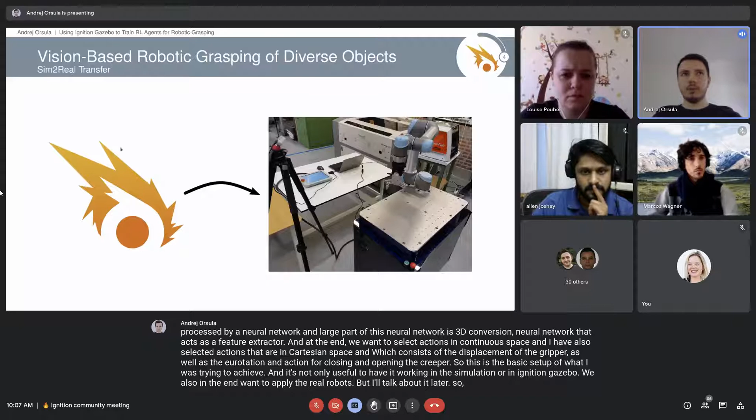But how does one start with creating a reinforcement learning environment inside Ignition Gazebo? For that, I can recommend using GymIgnition. It is a framework that provides an interface for Ignition Gazebo.

This includes a Python interface, which makes it simpler to integrate with some of the popular deep learning and reinforcement learning frameworks. GymIgnition also provides tooling for creation of OpenAI gym environments, meaning the environments you create will follow this standard and be compatible with other reinforcement learning frameworks.

This means you don't actually need to implement the algorithms yourself. You can just use them from other frameworks. For example, in my case, I use Stable Baselines 3 for the implementation of actor critic algorithms.

Once you start building the environment and defining the logic behind it, you will come to a point where you want to insert some models into the simulation. So where to find it?

Again, for this I'll just recommend using Ignition Fuel. It was discussed a few meetings ago. It's really nice. In particular, I have decided to use the Google Scanned Objects collection from Google Research, which contains more than 1,000 different objects, which are 3D scanned.

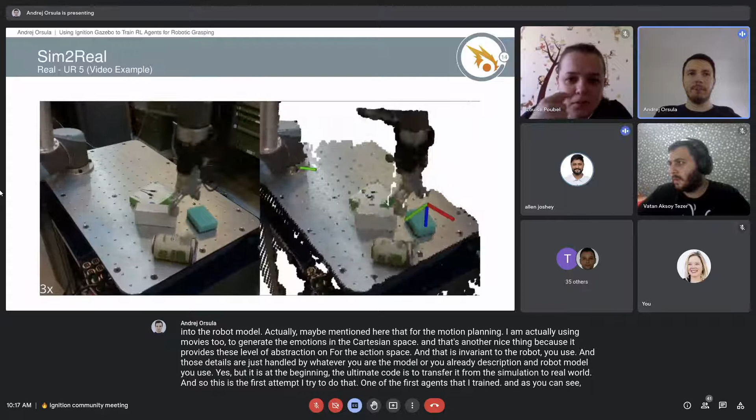As I said at the beginning, the ultimate goal is to transfer it from the simulation to the real world. This is the first attempt I tried, one of the first agents that I trained. As you can see, the policy is not very deterministic. It still does some random actions, but eventually it's able to grasp some of the objects.

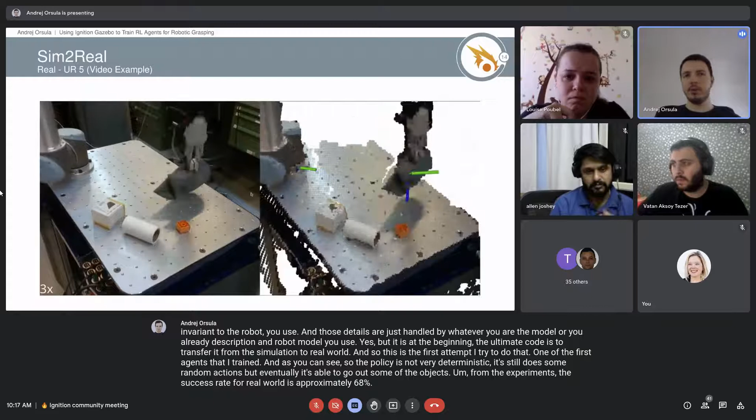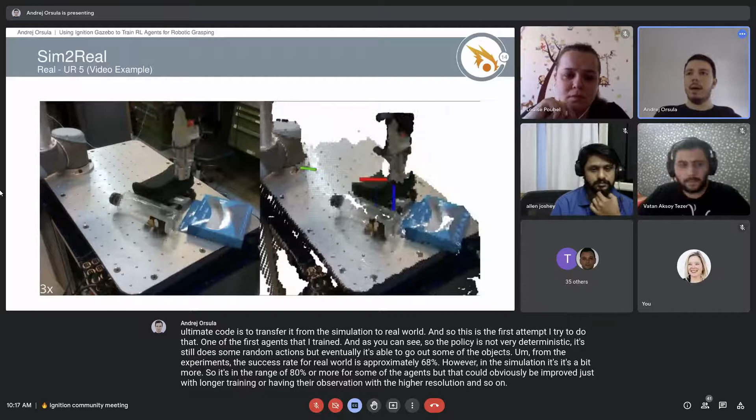From the experiments, the success rate for the real world is approximately 68%. However, in the simulation it's a bit more, so it's in the range of 80% or more for some of the agents. But that could obviously be improved just with longer training or having better observation with a higher resolution, and so on.

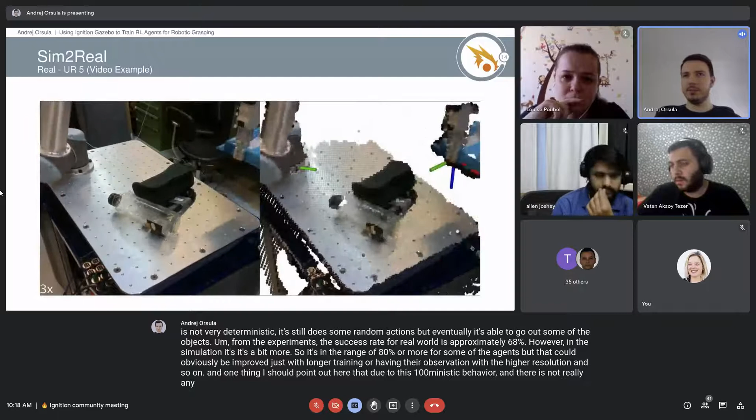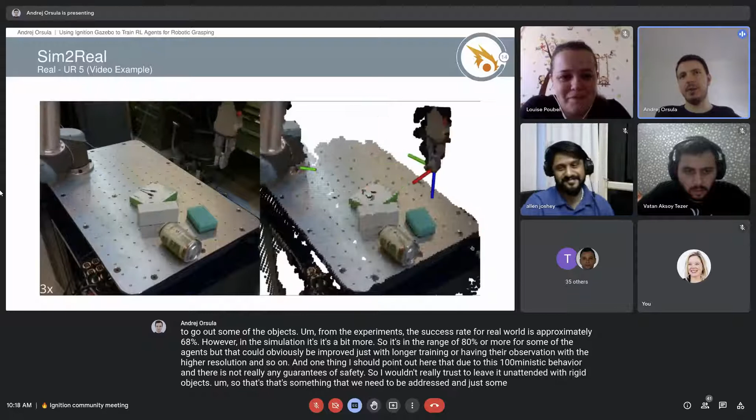One thing I should point out is that due to this non-deterministic behavior, there are not really any guarantees of safety. So I wouldn't really trust leaving it unattended with rigid objects. That's something that will need to be addressed, incorporating some safety into it, probably with some traditional approach or something.

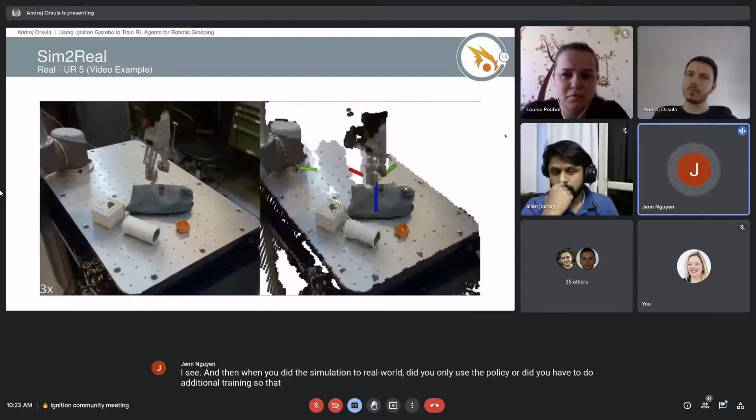I see. And then when you did the simulation to real world transfer, did you only use the policy, or did you have to do additional training so that it works well in the real world? What were your difficulties with that?

There was no retraining in the real world, so it was just trained in simulation and then directly transferred to the real robot using exactly the same thing. The only difference was the controller for the robot, more or less, and use of a physical camera to acquire the data instead of Ignition rendering.

Okay, thank you. I have a question. So as you presented your results, you said that in simulation you had approximately 80% plus accuracies, and then in real world you got a bit lower, as you said, close to 70%, right?

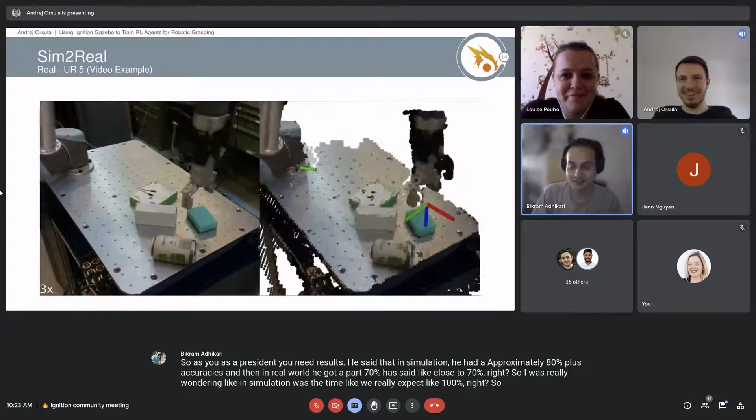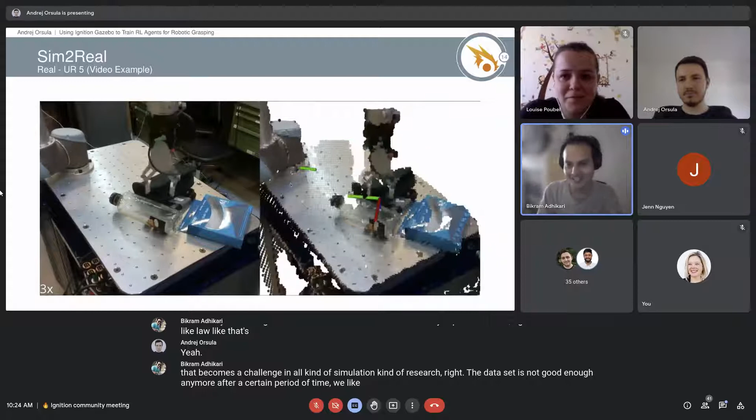So I was really wondering, in simulation, most of the time we really expect like 100%, right? So at least that becomes a challenge in all kinds of simulation research. The data set is not good enough anymore after a certain period of time. We're really good at grinding the data. So what are the things that made you feel like at 80% you're pretty good with your simulation work?

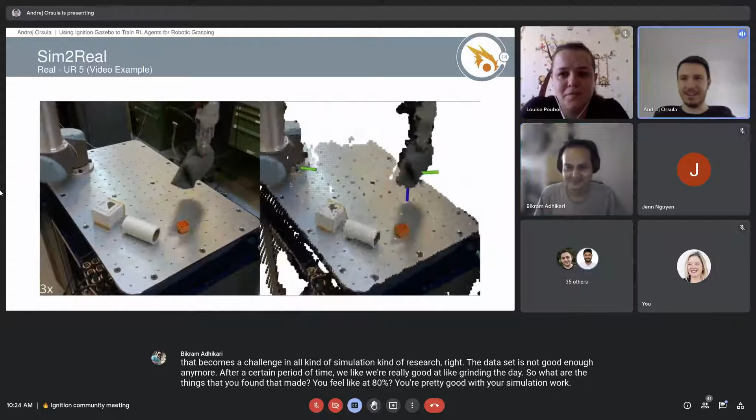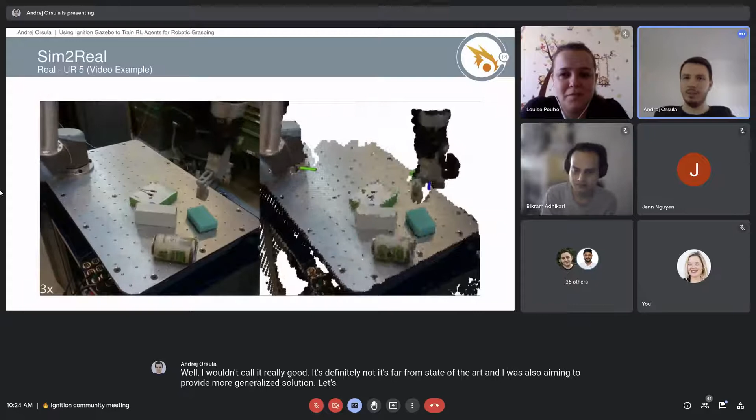Well, I wouldn't call it really good. It's definitely not. It's far from state of the art. But I was also aiming to provide a more generalized solution, let's say, and it's also an end-to-end approach, whereas some of the more robust solutions would use grasp synthesis instead of full control.

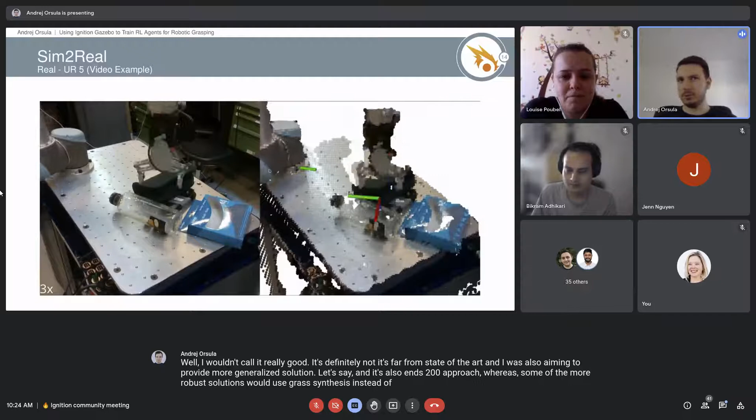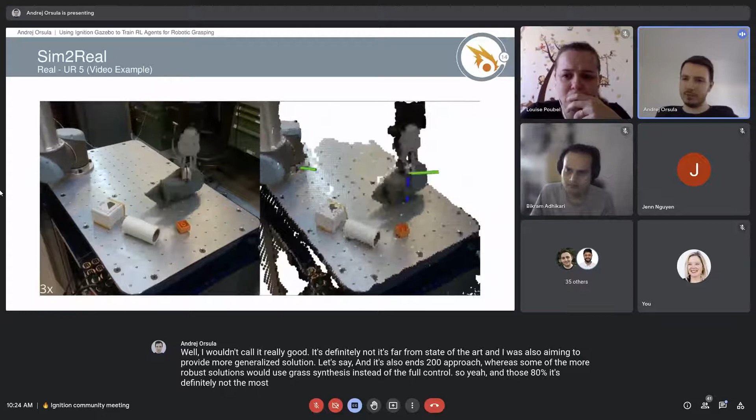So yeah, those 80%, it's definitely not the most that can be achieved on those objects within the simulation. It's just what I had time for, let's say, to train. Obviously, it would be much nicer to have it trained for longer, but I only gave 3 days for each of the agents.

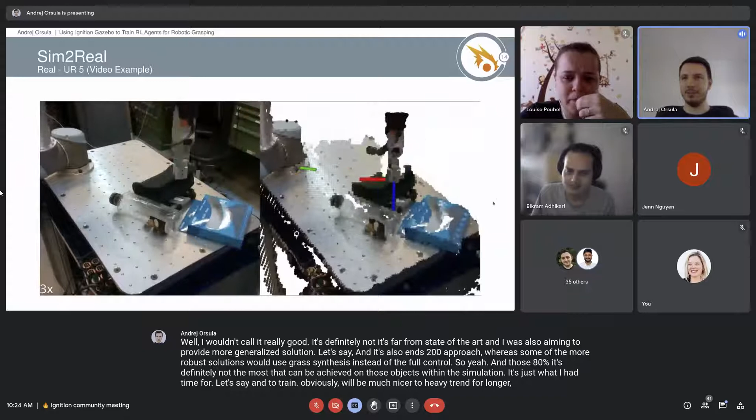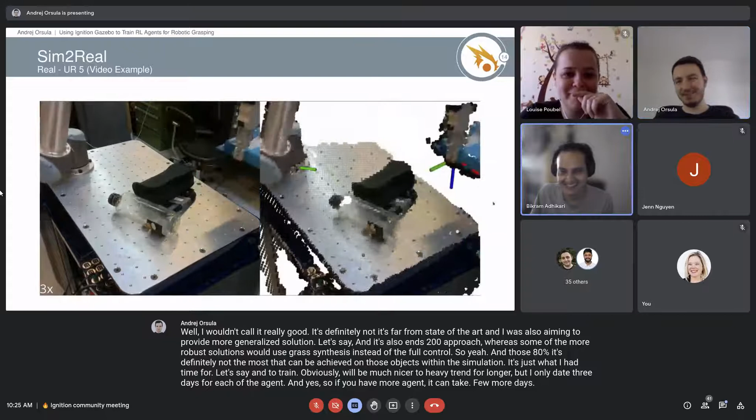Yes, so if you have more agents, it can take a few more days. Yeah, thanks, Andrej. Nice presentation. Thank you very much. Thank you.

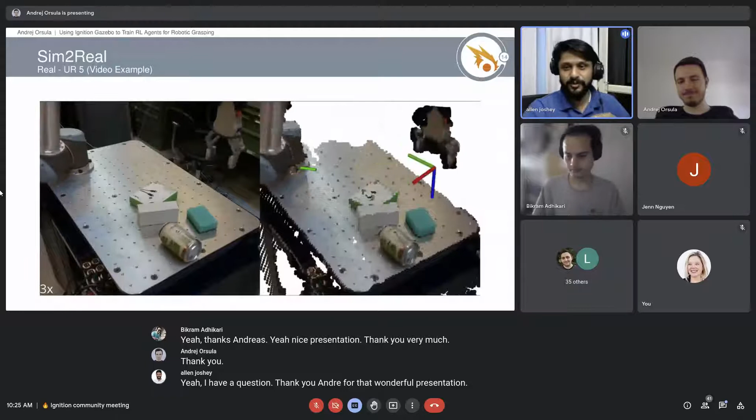Yeah, I have a question. Thank you, Andrej, for that wonderful presentation. I just wanted to know if you have considered any sort of sensor fusion approach to this, in terms of maybe taking feedback based on force or torque, based on the rigidity of materials. Is it possible to go ahead and fuse that so it hopefully gets better at the whole grasping setup?

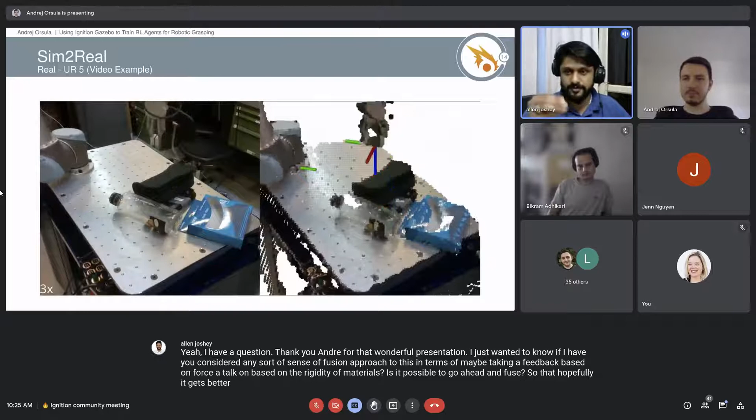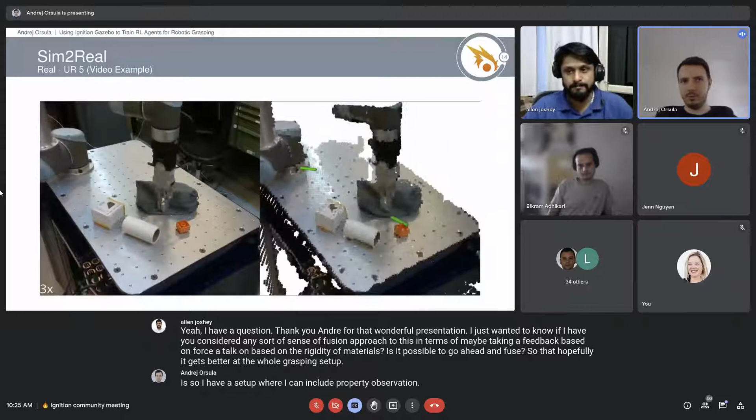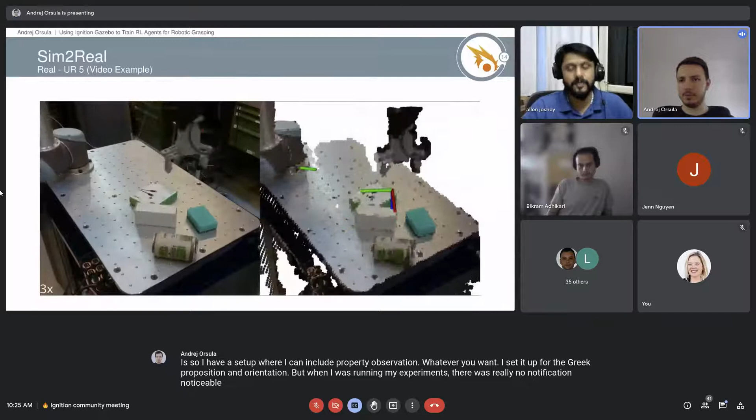Yes, so I have a setup where I can include proprioceptive observation, whatever you want. I set it up for the gripper position and orientation. But when I was running my experiments, there was really no noticeable difference in the success rate between those two. It was only like 2% across all scenes, which wasn't really worth the effort.

But it might be a good idea if you want to include the forces and torques, as you mentioned, especially if you have some sensitive objects and so on. I was really just focusing on rigid objects, and I wasn't really worried about breaking. Right, okay, thank you.

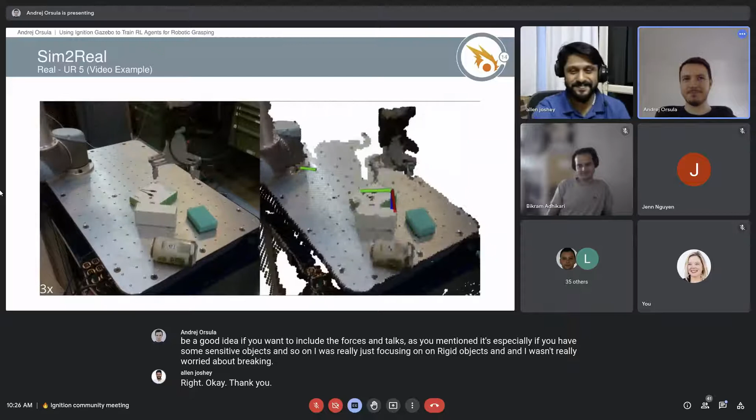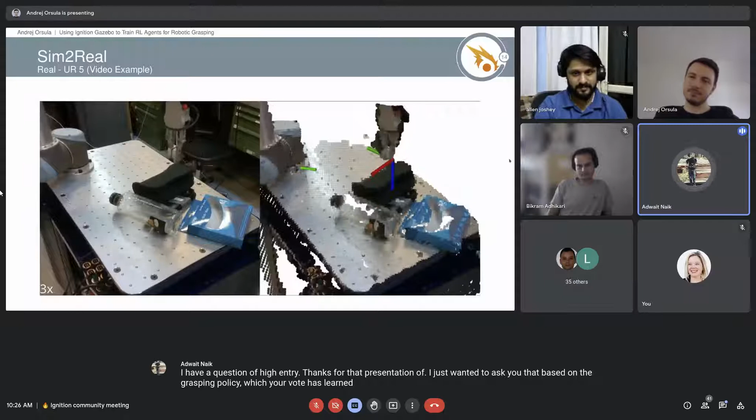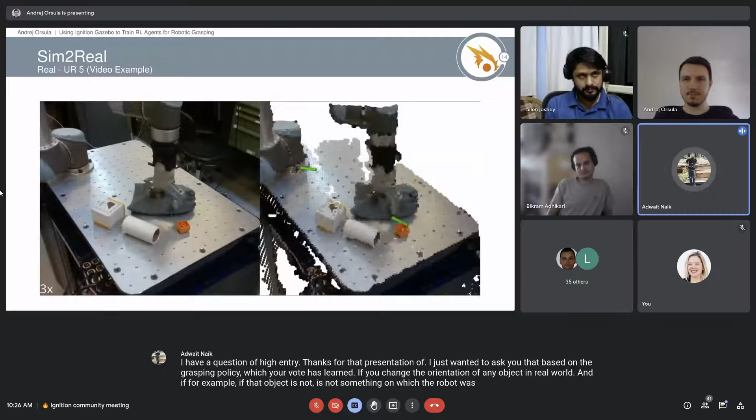I have a question, hi Andrej. Thanks for that presentation. I just wanted to ask, based on the grasping policy which your robot has learned, if you change the orientation of any object in the real world, and if, for example, that object is not something the robot was trained on, so it's an unseen object.

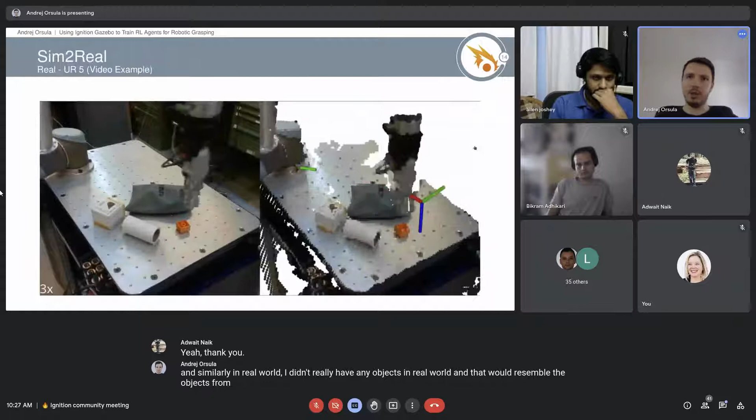So can your robot pick it while training it in the real world? Yeah, so all of these objects were previously unseen, and actually these are all novel scenes. As I showed here, I separated the dataset for training and testing. This was used to actually evaluate the agents, and those were the 80% or whatever it can achieve. Similarly, in the real world, I didn't really have any objects that would resemble the objects from the simulation. It was just some random objects that I had in my hand.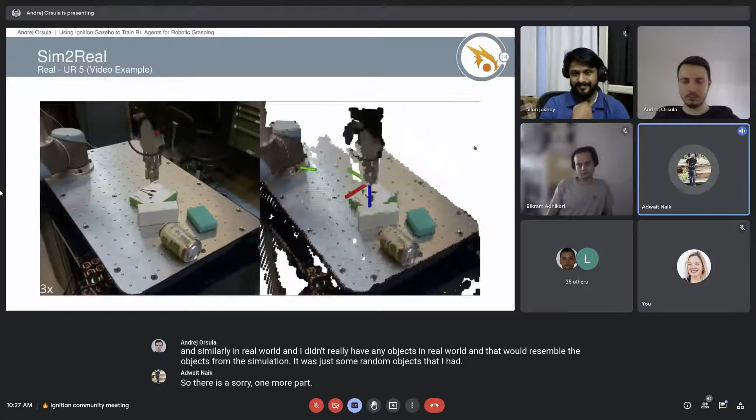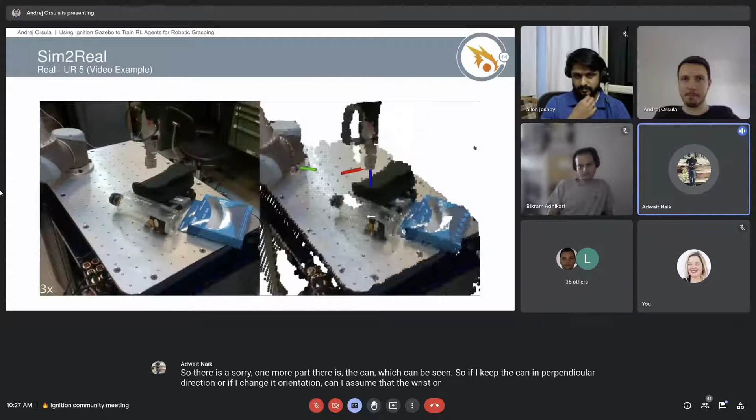So there's one more part, sorry. There is the can which can be seen. So if I keep the can in a perpendicular direction, or if I change its orientation, can I assume that the wrist or the end effector is also going to change its orientation according to the object?

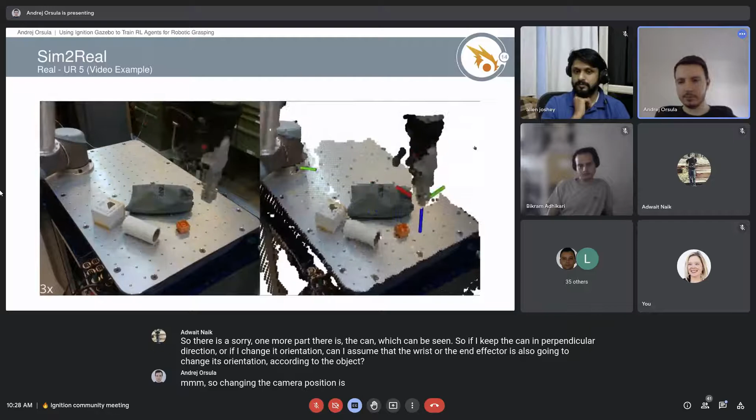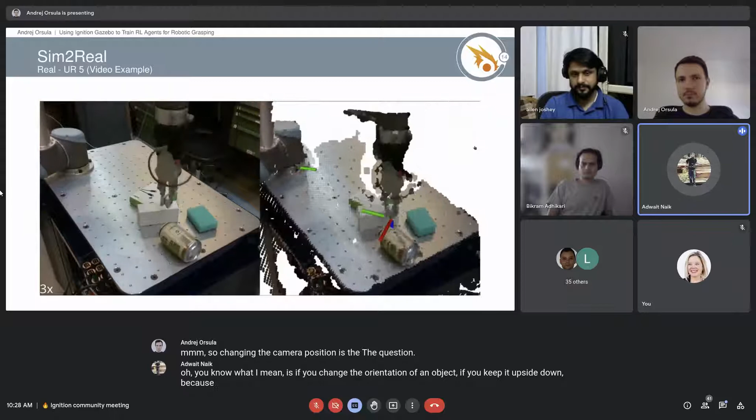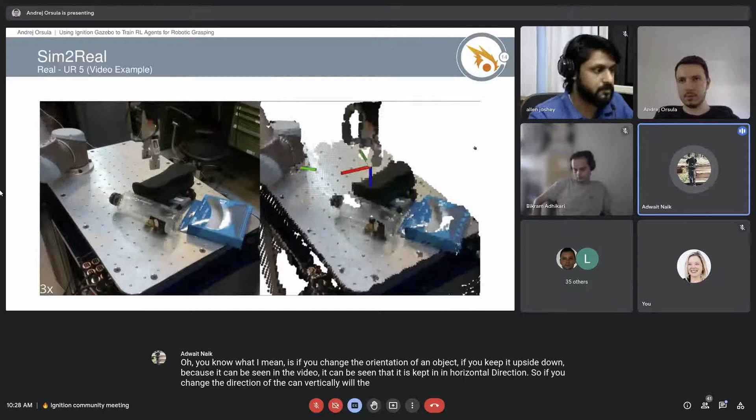So changing the camera position is the question? No, what I mean is, if you change the orientation of an object, if you keep it upside down - it can be seen in the video that it's kept in a horizontal direction. So if you change the direction of the can vertically, will the wrist, will the end effector, also change according to the can?

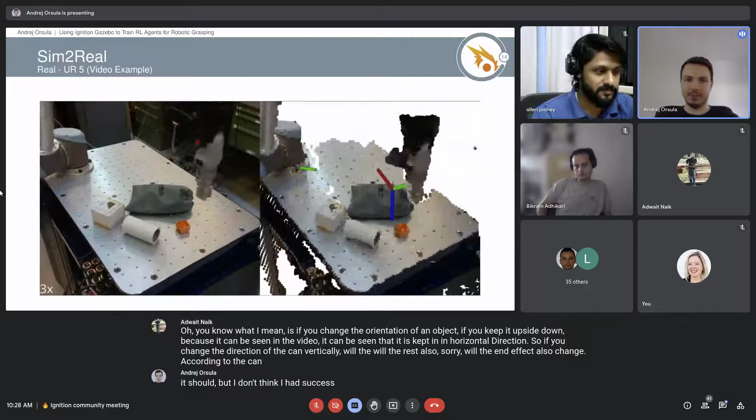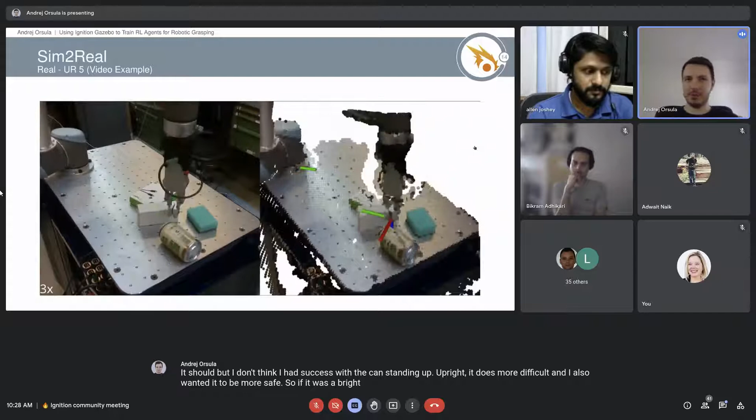It should, but I don't think I had success with the can standing upright. It's just more difficult, and I also wanted it to be more safe. If it was upright, it would be more structurally rigid, and there could be some damage if the robot hit it from top down. So that's why I just let it lay down.

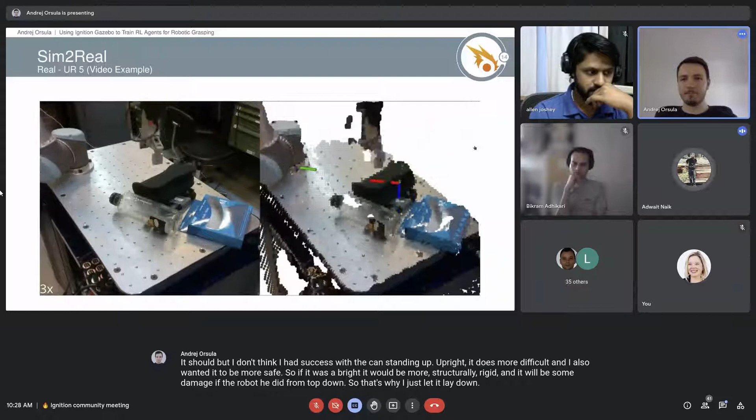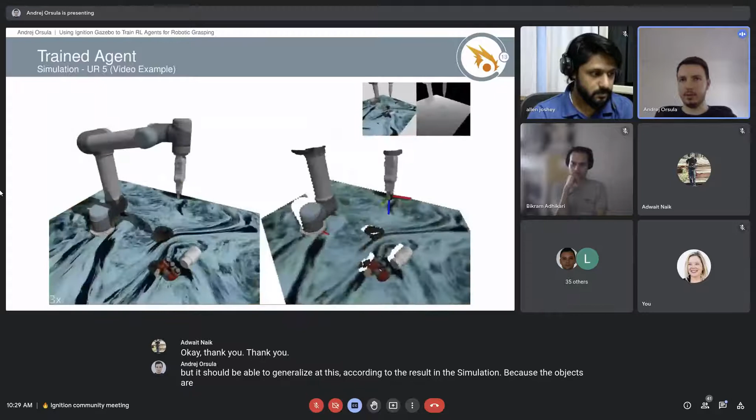Okay, thank you. But it should be able to generalize, at least according to the results in simulation, because the objects are spawned randomly. Obviously there is some bias when I am placing the objects there - I don't place them in a way where it could damage the robot. Okay, understood, thank you.

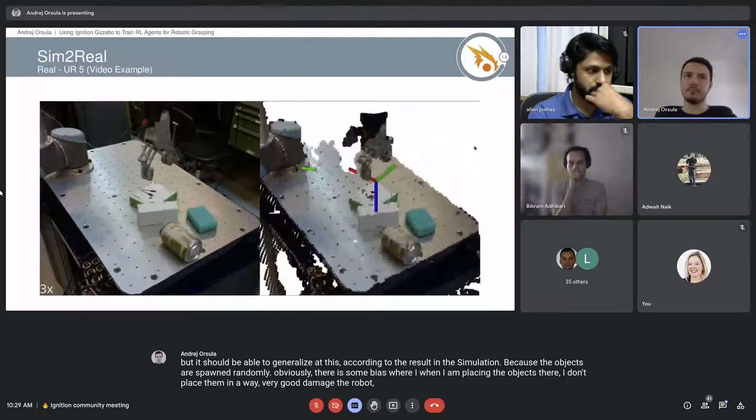So this is not all of them. I did not use all of them because currently the assets for both the mesh and texture within Ignition are kept within RAM and VRAM, which means I would run out of memory if I tried to use all of the objects, which is why I selected just 80 and 20 - 80 for training, 20 for testing.

Yes, but how have I selected this? I just aimed for the ones that were single objects and that had some variety in them. Also, many of these objects are either boxes or shoes or similar objects, and I didn't want the majority of my dataset to be just boxes and shoes. So I aimed to not only have different visual appearance, but also different shape.

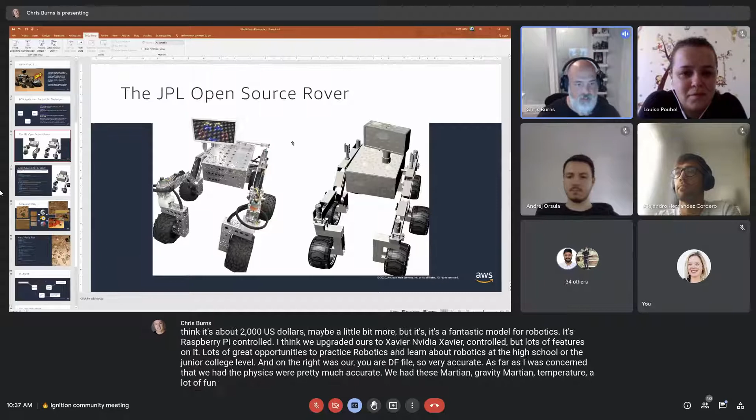On the right was our URDF file, very accurate as far as I was concerned. The physics were pretty much accurate. We had to use Martian gravity and Martian temperature, which was fun to experiment with to get correct. As mentioned, this exists as a URDF file, with a camera and several IMU sensors on the wheels to detect speed.

We kept the challenge relatively locked down. I struggled creating it, with making it too hard or too easy. If too hard, nobody would have fun and it would be a black eye. If too easy, we'd have 5, 6, 20 winners, and there was an actual cash prize—I think it was 20 grand, not a trivial amount. So I struggled with that.

Some of the things we did: I controlled the motion of the rover to only forward, left, and right, so you couldn't go backwards or change speeds.

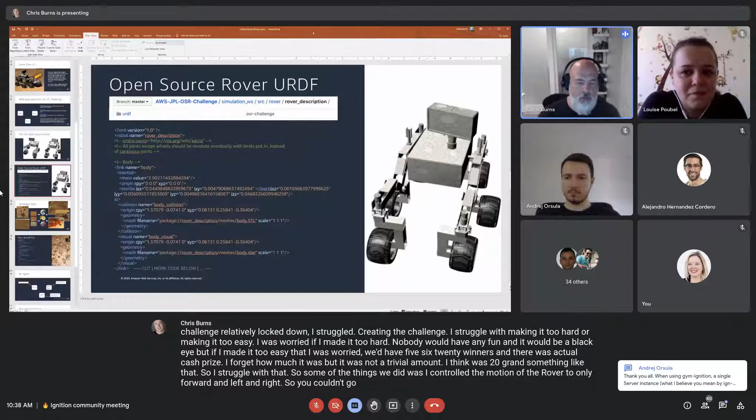Now, the simulated Mars surface—listening to the first caller's presentation, I wish I'd had some of his tools in my toolbox before starting this challenge, because what I started with was some internet pictures of Mars, a few textures, and many, many hours learning MeshLab, Blender, and Meshmixer, that's Autodesk's tool. What I'd do is create a 3D rendering as close as I could to one of these pictures, then add the textures with Blender.

Then I'd go into Meshmixer and decimate. He had mentioned the number of polygons in some models—some I was creating had hundreds of thousands of polygons, and Gazebo just wasn't having it. So I had to decimate that down to the point where the Martian surface was navigable but also loadable in RoboMaker, since I didn't want to require a fleet of compute just to run one simulation. This existed as a world file.

This was a fun experience putting together and learning about. You start with the default, and you can see here we have the Martian gravity, and we tried to put some Martian temperatures in there. It had very little bearing on the challenge, admittedly, but when talking about actual fluid dynamics and mechatronics, Martian surface temperatures vary drastically from Earth. That's something that would be interesting for a future challenge.

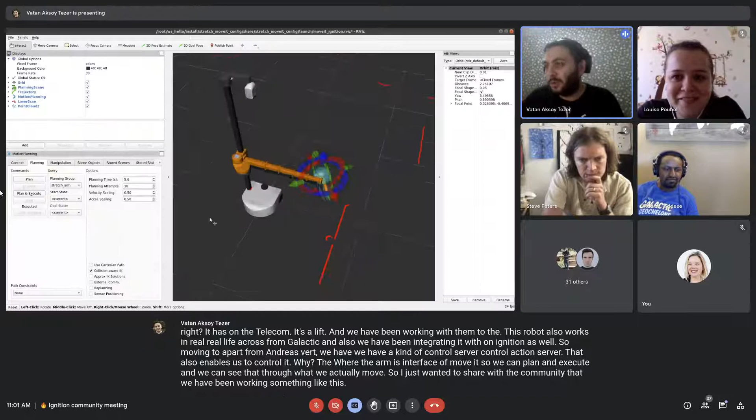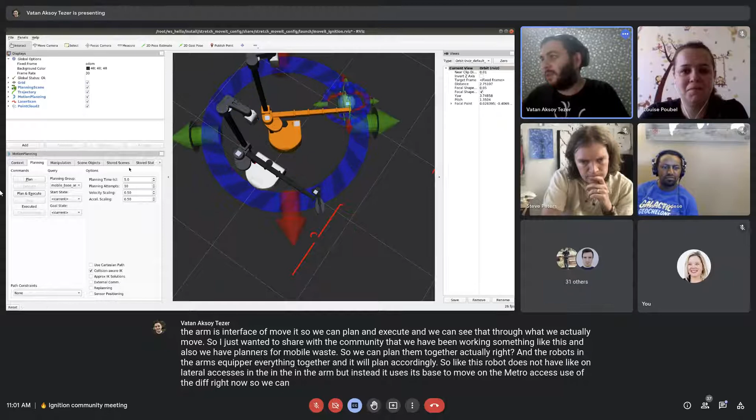With MoveIt 2, apart from Andrej's work, we have a control action server that enables us to control it via the RViz interface to move it. So we can plan and execute, and we can see that the robot can actually move. We also have planners for mobile bases, so we can plan the robot, the arm, the gripper, everything together, and it will plan accordingly. This robot does not have lateral axes in the arm, but instead it uses its base to move on the lateral axis using diff drive. So we can just command plan and execute, and it will turn and function on Ignition as well.

Also as part of the project, we ported the AWS RoboMaker small house world to Ignition. I'll hopefully send the PR to them soon. So now we also have the world working on Ignition with the objects slightly changed so that we can grab them rather than them being static objects. Just wanted to share our progress, and maybe someone will find it cool.

This is really awesome, Vatan. You should come back another day to take the entire meeting to show us what you've done and teach people how to use it. Let's talk about it afterwards. Unfortunately today, sure, we're kind of over time already, so I don't want to keep people here longer than promised.